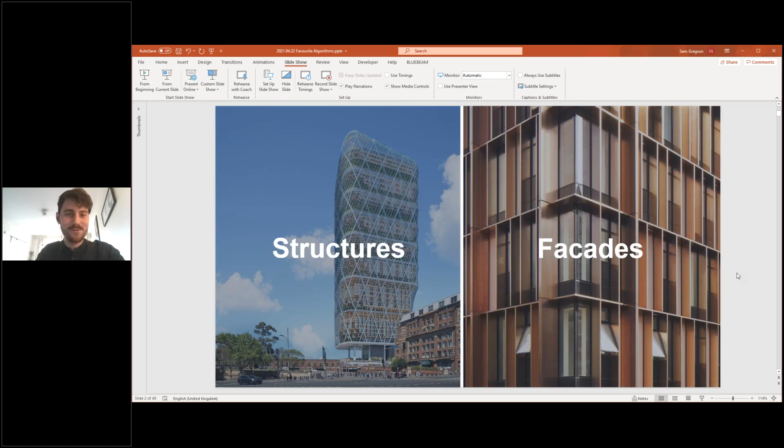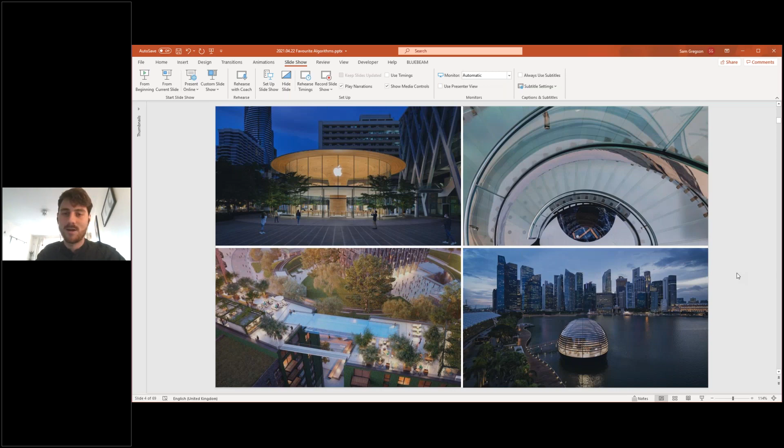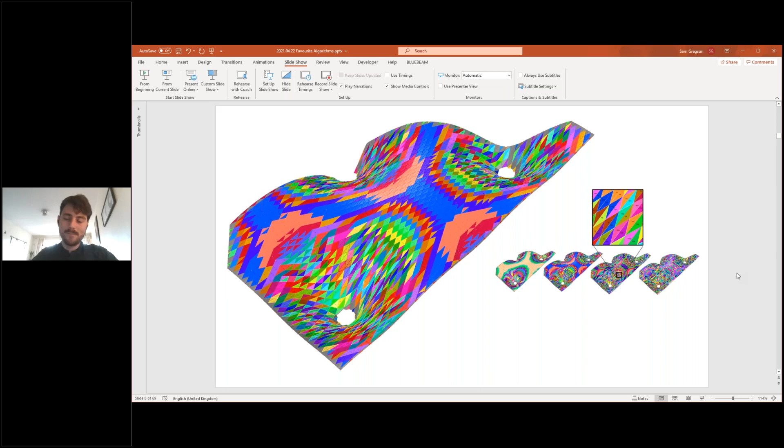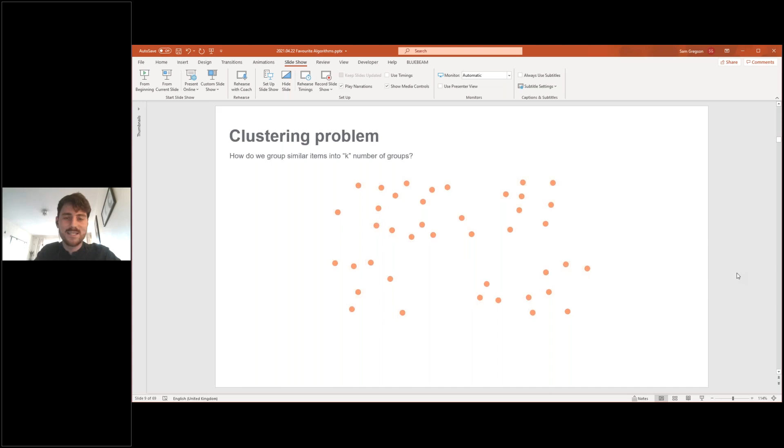I'm going to go through the problem, which sounds very simple but is actually quite hard to do. The problem is: how do you group a number of objects into k groups, where k is the number of groups? This is how the algorithm works.

Say we want 4 groups - this is the basic vanilla version. You pick 4 items, assign the groups based on the closest item to each one, then move that original point into the mean of those groups, and repeat. As we progress through here, the points get reassigned to their closest center mean, then the points move to the center of those objects, and we iterate until we converge.

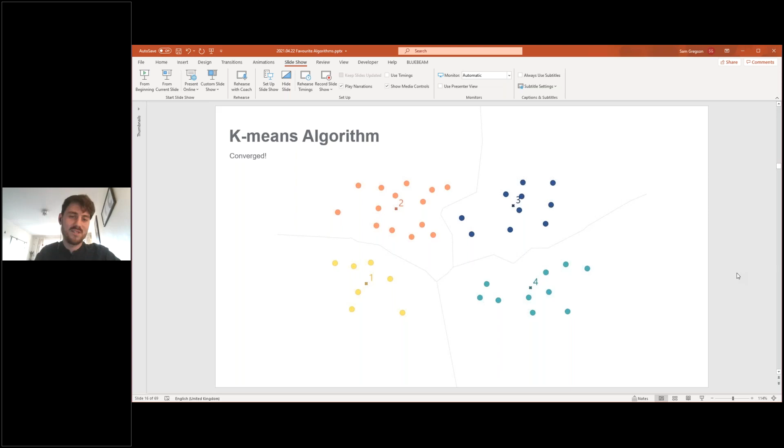So it's a nice simple algorithm, which is kind of why I like it. I'm a simple person, and it seems to work quite well. So there's our kind of output.

So when it comes to panels, the first thing we've got to figure out is how do we measure the distance between two panels. It's quite easy to understand how you'd measure distance between points in space, but with panels, how do we measure their similarity or difference? So two triangular panels will be the same if their edge lengths are the same.

Some other things to consider are whether we're allowed to flip panels, and then there's some other considerations when we go to higher polygons, quadrilaterals, etc.

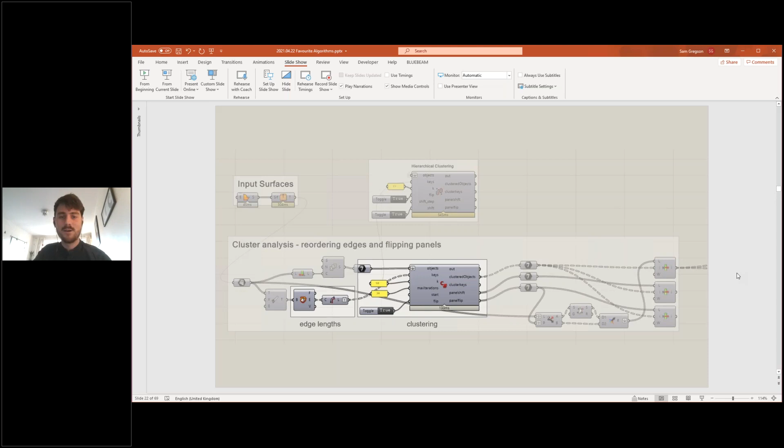So this is kind of what it looks like in our Grasshopper environment. We've got our edge lengths here. We stick it into our clustering algorithm, tell it whether we're allowed to flip or not, and it spits out our clustered objects and our panel shift and panel flip parameters. So it's a little bit more complicated than that, as you could well imagine.

We've got our groupings, but that doesn't mean that they're all identical. So we create an average and then replace our panels in their original position.

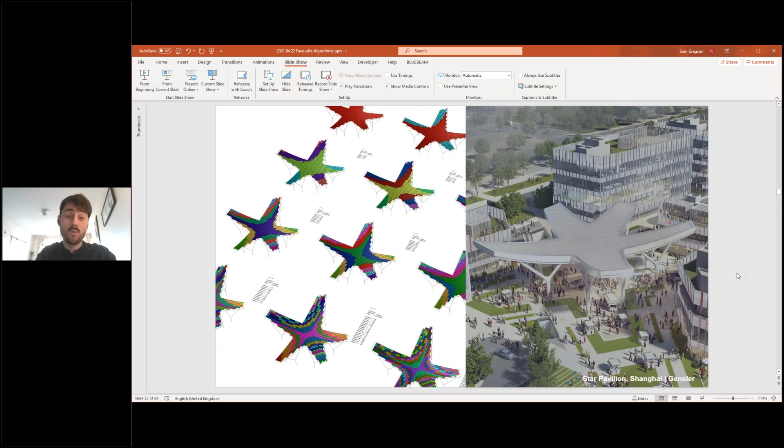So here's a little study we did for a Star Pavilion, and we're looking at how K, the number of groups, affects the deviation of each of these panels - basically the gaps that we'd need between them. In the end, the client decided that he was very keen on having as few panels as possible, and didn't really care about the gap, as it was a rain screen system, and we were fine with that in the end. But it was interesting to do this study, looking at how that changed.

Now, in this study that I did recently for a project, we had a more free form architecture, which meant we were more able to play with the geometry. So here I'm using Kangaroo in the background for clustering, and then smoothing the structure to fit the clusters and repeating.

So there's a bit of Kangaroo play there, and you can see the deviations coming down to about 3 millimeters for 10 different panels.

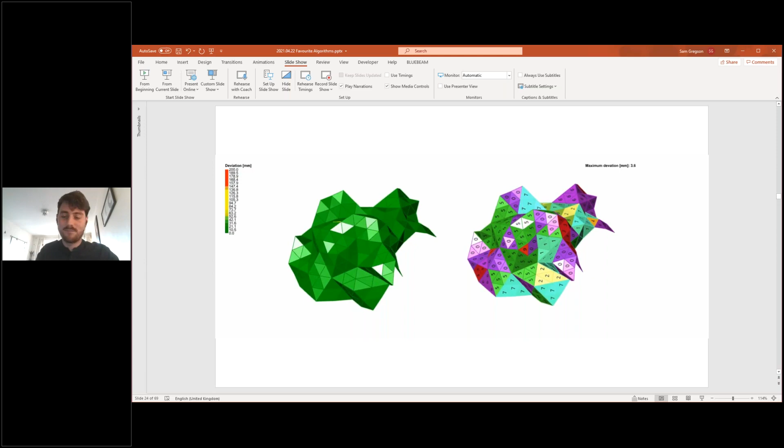So a few things to consider. One, about the algorithm side of things - what is K, how many panels do we want? And as you can see, you can play about and see what the deviation is. Another thing to consider is how you measure distance. I've explained about triangles, but you might be comparing other things, not just panels but any sort of geometry, and there might be some normalization needed.

But other things that are really important that I want to stress are the other side of things to consider, which is what is the tangible benefit you're getting? Because it's nice to think that if we make many panels the same, then everyone will be happy, but you might just be simplifying one part of the process and adding complexity in other parts.

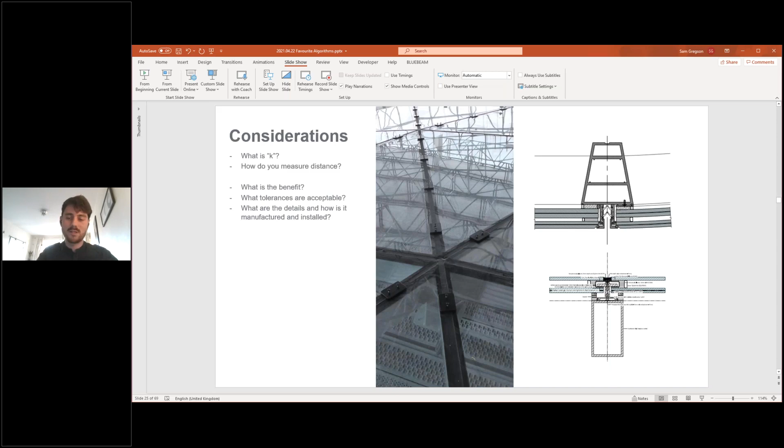So what tolerances are acceptable? In these two questions, you really need to think about the details - how's it manufactured, how's it installed? It really depends on the system. Have we got an open joint rain screen cladding system where the joints are allowed to be large, or have we got some toggle fittings or clamp detail where really we're only talking about a handful of millimeters that's acceptable? So some interesting thought needs to go behind these as well.

This was a cruise ship project. What was interesting here is other ways of tackling this problem. We're using normal geometry like a torus here. So Martin Francis, the designer, chose a torus layout to get a high level of repetition.

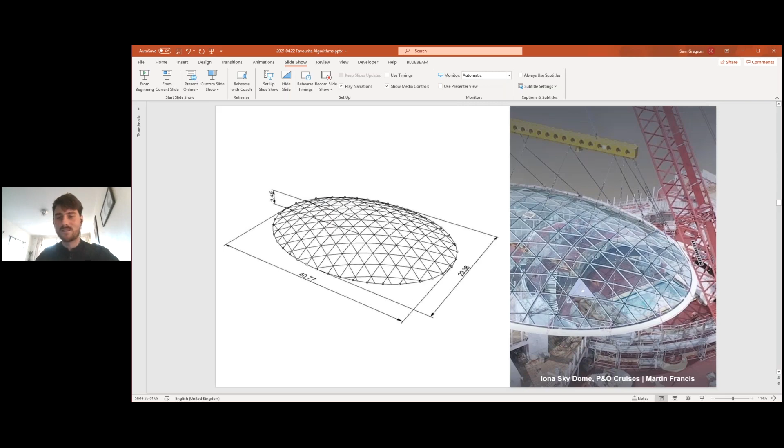So not using clustering panels, but the reason I bring this up is because at the end of the day, the contractor was like, well, I don't mind, I'm cutting these panels with machines and it's all going to be automated, and he smoothed things, changed things around as he wanted. So it was an interesting thing to note that it's not always of benefit to do these things, so that kind of needs to be considered.

And here I just want to show properties. So on the left, I've got a nicely optimized structure. This is a pavilion structure which is glazed with glass.

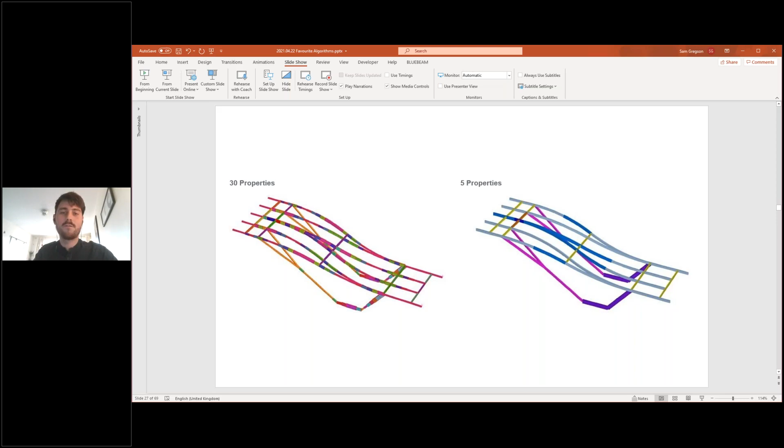I've optimized it. Every beam size is as optimal as it can be for stresses and deflections, but it's not very buildable. So one nice way of using k-means is reducing the number of properties here, and then you've got the rationalized element model on the right, where we've only got 5 properties down from 30.

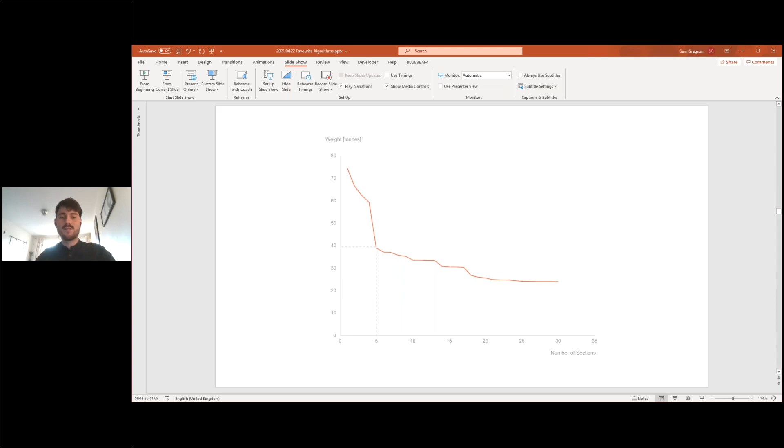And I find this quite a nice visual to demonstrate what happens when you reduce the number of sections, which is on the x-axis, and what happens to the weight of the structure. You can see here it really starts to spike when we reduce it further below 5. So that was chosen as our stopping point, a nice balance between steel savings and making it easy to fabricate.

So my next one is SIMP, or solid isotropic microstructure with penalization. You might not know the name, but this is a topology optimization algorithm. Clemens might talk about BESO - I know that's in his Karamba software, but SIMP is another popular method.

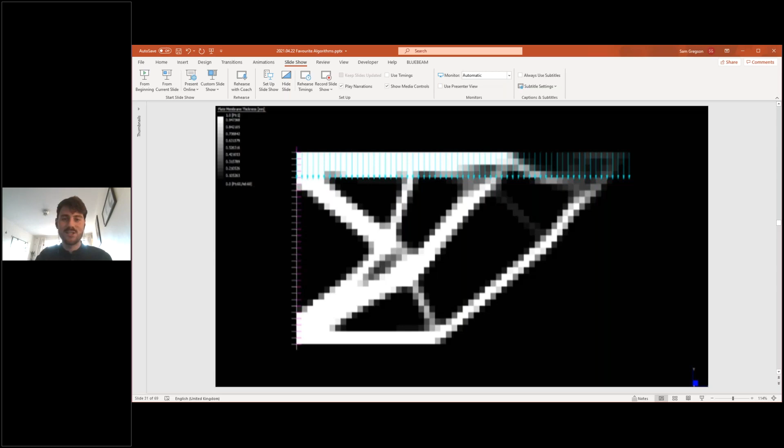It's inspiration. I think people take these things too literally, and what I want to get across is that you can use them to inspire and also to understand.

So here's a dome for a different cruise ship project, and here we can see we're minimizing strain energy, which is a measure of how well it's working, with some constraints there. What's quite nice is that it gives us a bit of understanding of the structure. So at the top here, we've got a two-way spanning structure because it's quite flat.

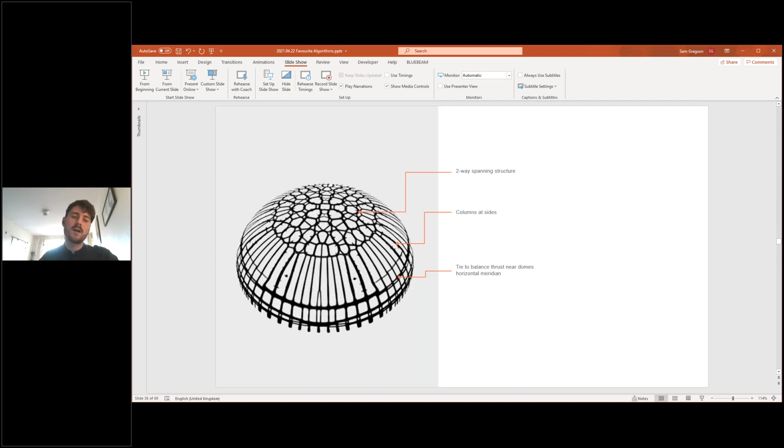Then we've got more or less columns at the side, and then where it bows round, we've got a tie, to contain the thrust that happens from the arching action. So it's actually quite a nice tool to understand how the structure wants to behave, and therefore if we do deviate from this, we understand what the consequences might be.

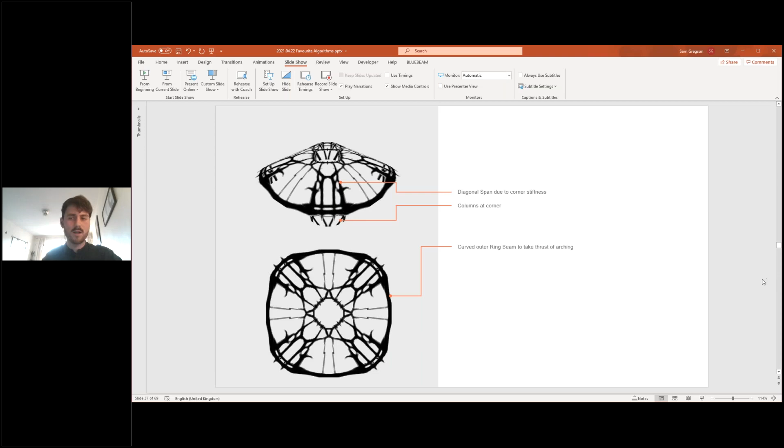So in this instance, the structure really wants to go to the stiff supports of the corners, and so it's added columns there as well. You really get a lot of insight, which helps you think about where you might, even if you don't build something like this, put your biggest columns, your biggest members. And then we've got a ring beam, again very similar to the last one, to contain the thrust from the roof.

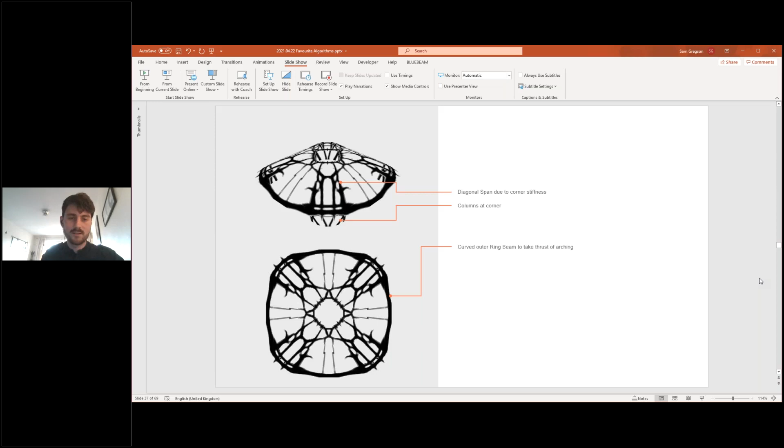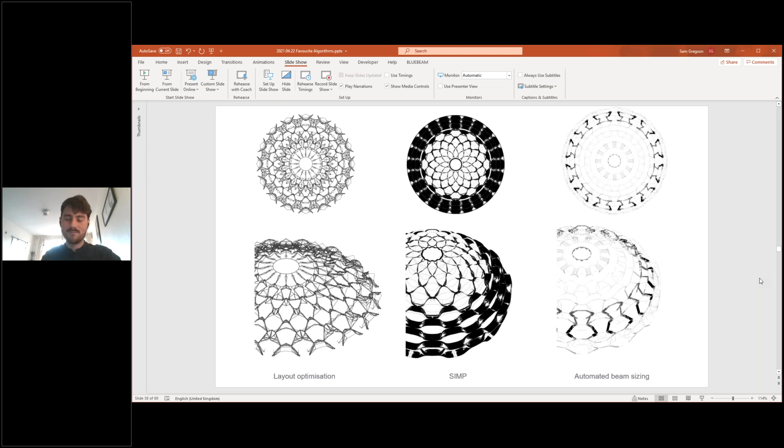There are some different methods - layout optimization. Peregrine is a Grasshopper plugin that does that. SIMP in the middle, and then automated beam sizing gives you similar ideas as well.

And then my final one is Nelder-Mead, also known as the downhill simplex method. This is a gradient-free numerical optimization method. You will all be familiar with Galapagos, which is a genetic algorithm. Nelder-Mead is similar but different. I'll just go through that.

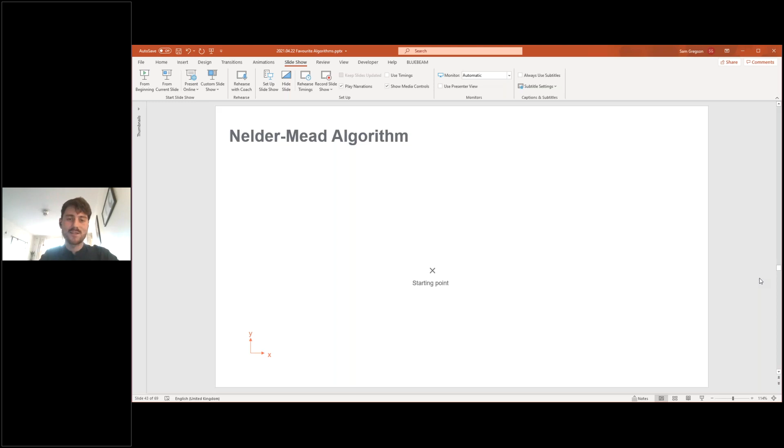So the way Nelder-Mead works is that this is in kind of 2D space. We start with a simplex, which is made of 3 points, because we're 2D, we go with 3 points - we just need one more, and that gives the algorithm an idea of which direction to go, because it's got arms in different directions, so it can feel which way to go. We know the worst point and the best point, and it moves in the direction based on the worst and best points.

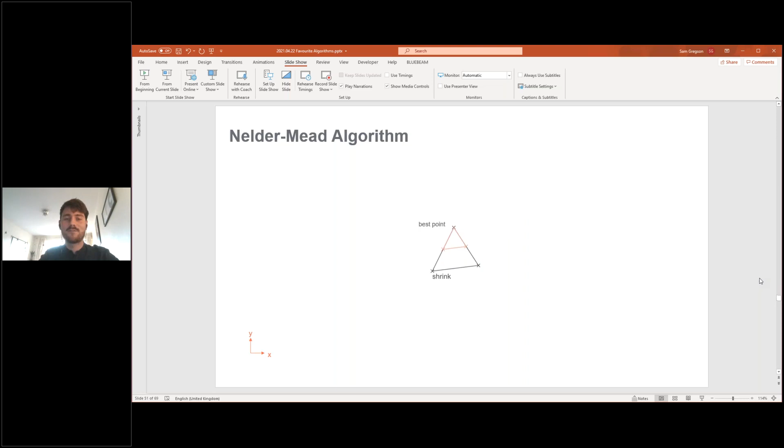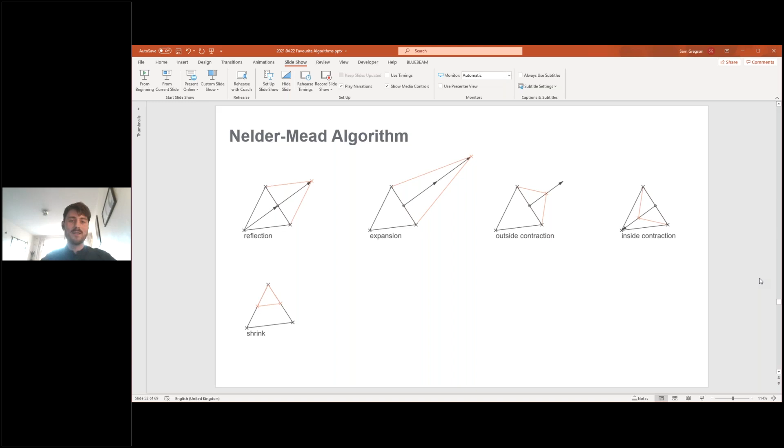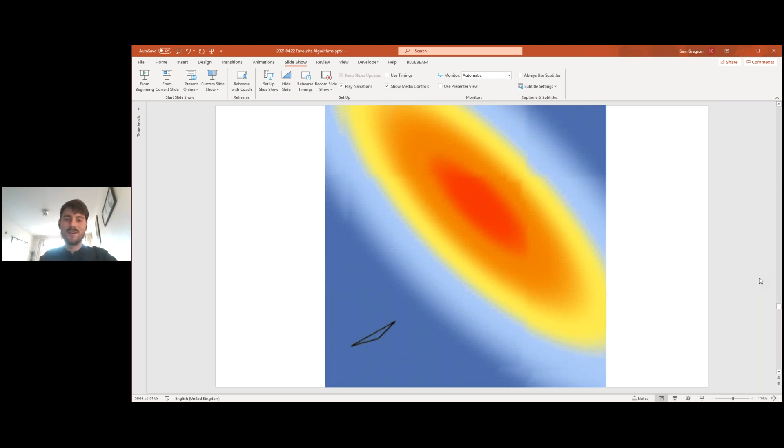Using different methods, either reflection or expansion. If reflection looks like a good direction, it tries expansion to go a little bit further. Maybe it wasn't quite as good. So there's these different methods that it moves about to explore, depending on how good the values it gets from moving around in space. So this is how it moves in 2D, a way to understand how it gets from the blue to the red, where X and Y are the input parameters. Obviously, this isn't the kind of problem that we're looking to solve, but you'll see some examples in a sec.

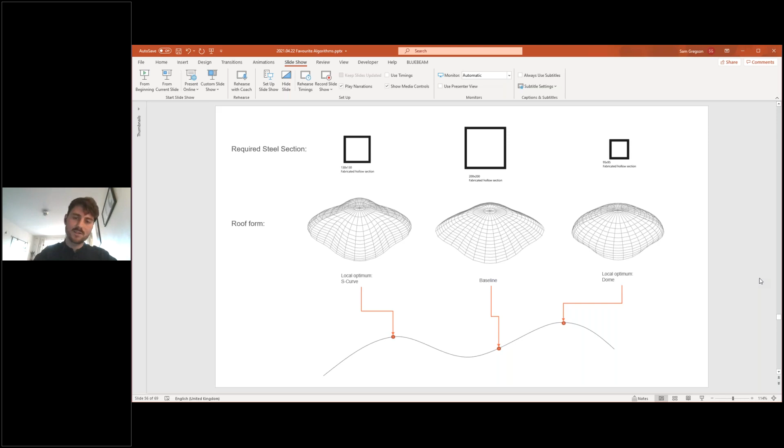We've got 2 local optima. We find those by restarting at new positions. So we've got our baseline in the middle, where you need a very big fabricated hollow section, and then for the local optima either side, we've got different aesthetics with different sizes, much smaller steelwork. So that was one example.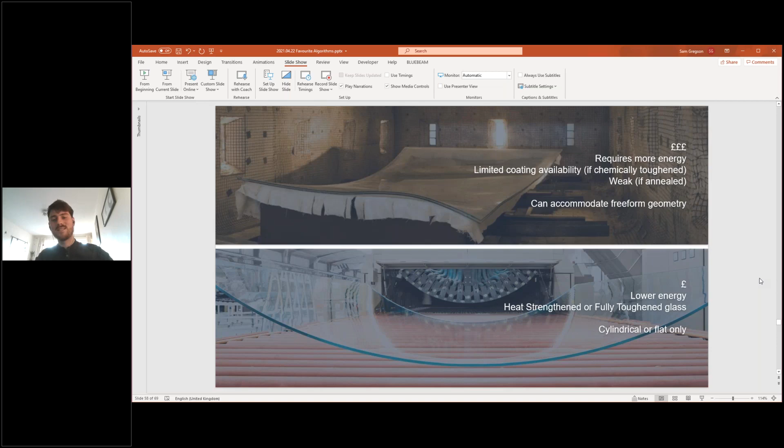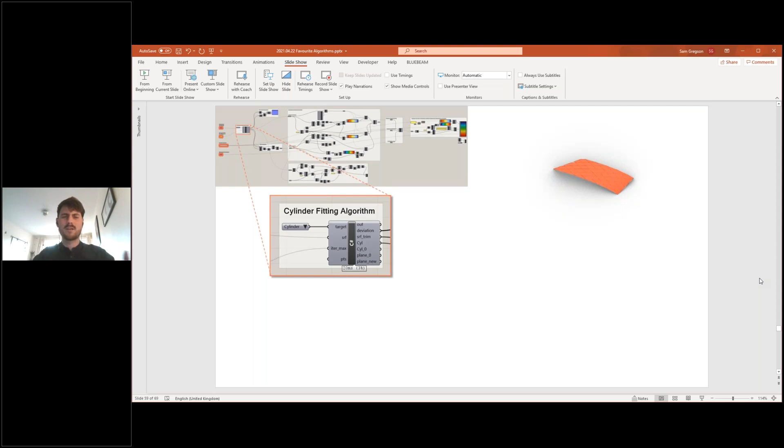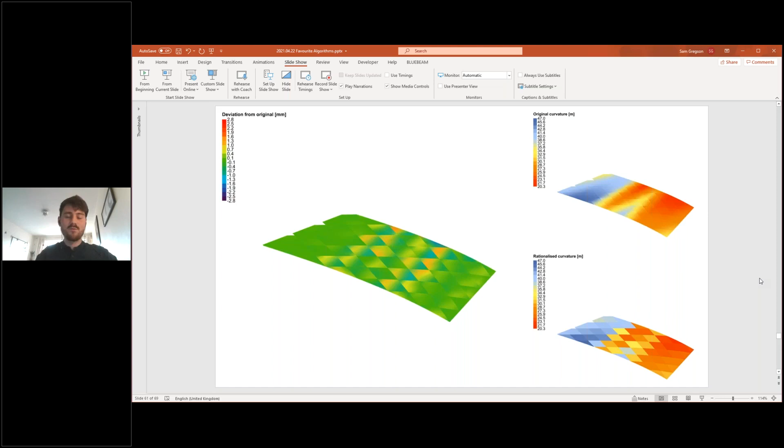So our other use for Nelder-Mead was to take objects, glass panels, and see what cylinder they might fit best to. So we've got a script on the left with our cylinder fitting algorithm. This time our Nelder-Mead is embedded inside our C# component, so there's no Galapagos interface. And we've got our panels on the right, and they spit out the optimal cylinders for them by moving around these cylinders and finding an optimum. So we can look at the deviations, the original curvatures, and the rationalized curvatures, and check whether these deviations are acceptable or not.

We did this on a project at Taikoo Place in Hong Kong. The architects originally were going for conical, which isn't the same as cylindrical, so we optimized, found our best cylindrical representation of those conical panels and replaced them with minimal visual effect, but now making it a lot cheaper and allowing the coatings that were required to be applied to the facade with better energy performance.

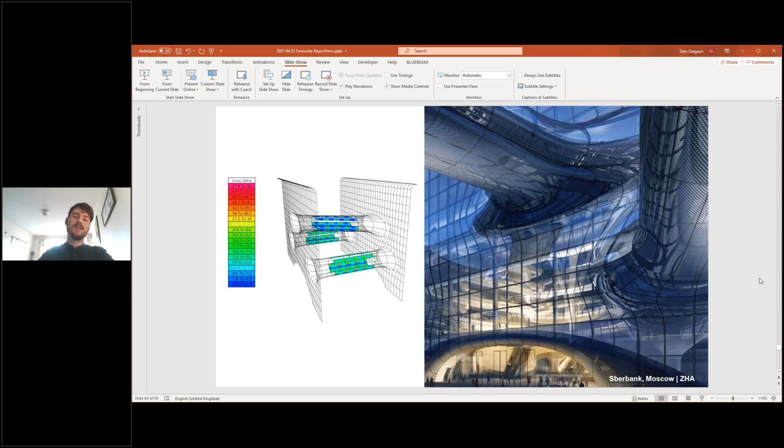Here's Sberbank in Moscow where we extended these capabilities, now looking at organizing the panels into flat, cylindrical, cold bent, slumped, and this required a little bit more analysis of the stresses. So we'll take in our models, going into finite element analysis, looking at the stresses and taking them back again.

And then finally, I just wanted to, because I know I'm short on time, touch on NURBS, which is work in progress, something I'm interested in at the moment, but want to spend some more time looking at. Obviously, Rhino started out as it was all about NURBS. That's how it started, I think, as an AutoCAD plugin to deal with NURBS.

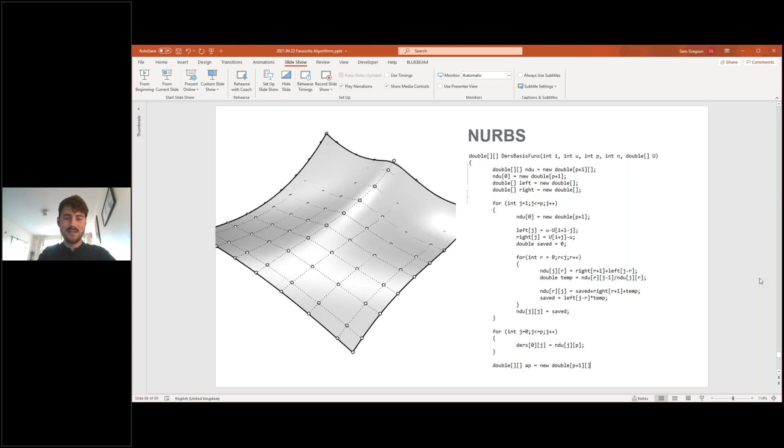But I only realized how cool NURBS were more recently with isogeometric analysis. That's kind of a new thing that's come in the last few years, at least from what I've seen. Kiwi is an example, but I think there's more potential for NURBS.

What I've been looking at specifically is, so NURBS is basically the mathematics of the structure, and you can derive all sorts of things like developability and stuff, and this will give potential to optimize freeform structures in a lot better way than we can do with meshes.

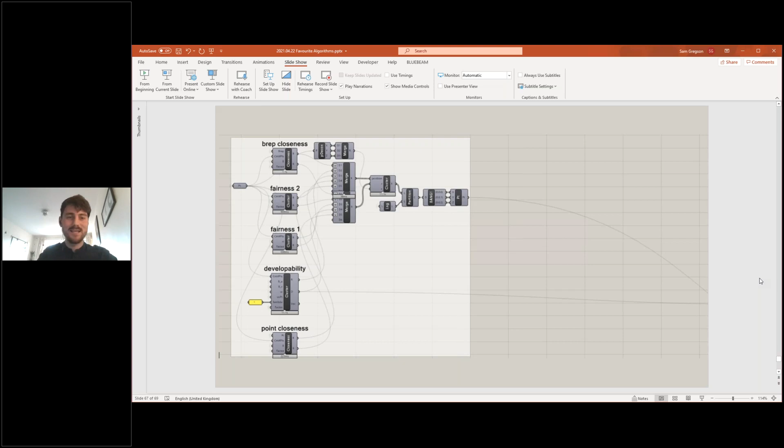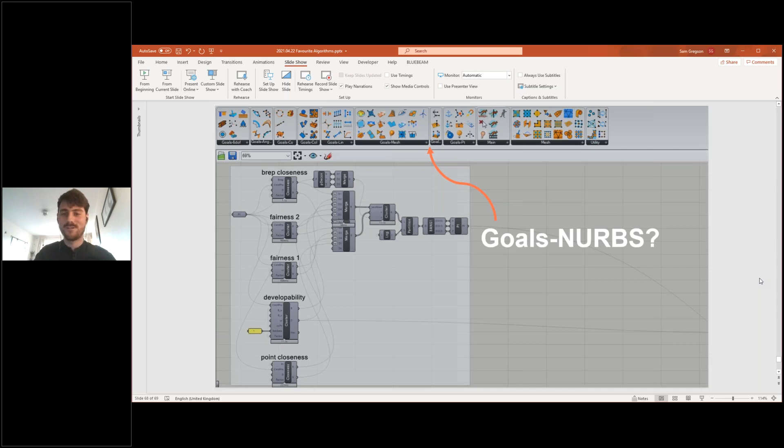So I've dabbled in this a little bit, and really what I'd like to see, hopefully I'll end up doing it, or if someone else could do it, that'd be great. Having a goals NURBS stuck into Kangaroo here, that would be great. I know Daniel Piker has now enabled us to program our own goals, which I think is a great idea. So if we could do this with NURBS and free us from meshes, then that would be great. That's something I'm looking forward to looking into further. So that's me, thank you.

Finite element calculations are usually connected with huge amounts of data which need to be passed around, and this makes the process quite sluggish sometimes if you have to export geometry from Grasshopper to some finite element package. Since Karamba lives inside Grasshopper, this bottleneck doesn't exist. This was one of the things we wanted to achieve, an interactive user interface, so that if you change something on the geometry...

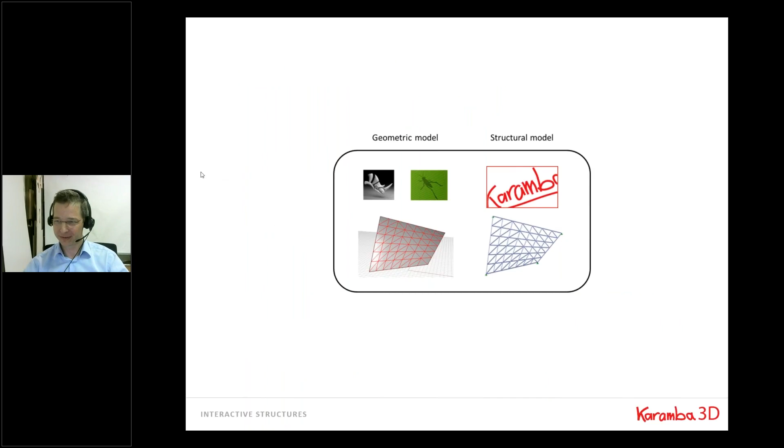Do you actually see my screen? Oh, I think it's stuck now. We can see your opening slide. Sorry, there we go. Oh yeah, but this was the slide which I talked about, that Karamba lives inside Grasshopper, and for some reason it's out of sync.

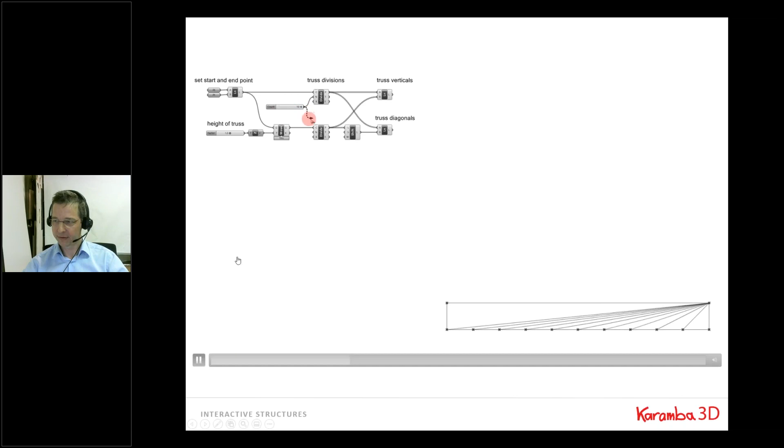Here you see that if you change something in the geometry setup, you can change the geometry, and via Karamba you also see the impact on the changed geometry, or the loading of the structure, on the structure itself. Since Grasshopper is an environment for doing geometry calculations, all the stuff which comes with structures, like loads, supports, cross sections, need to be supplied via Karamba.

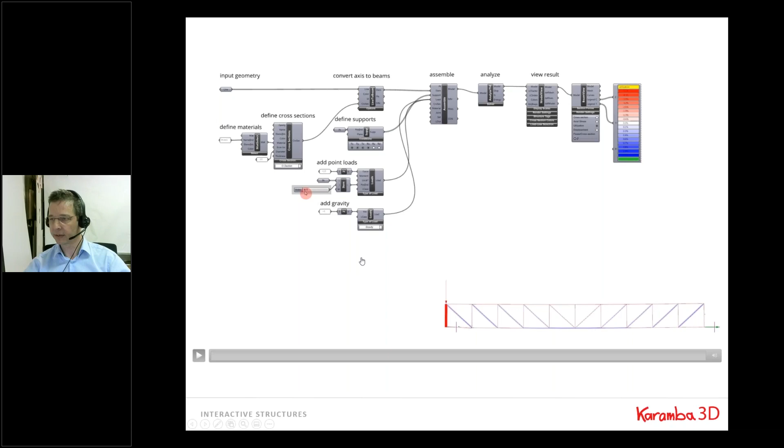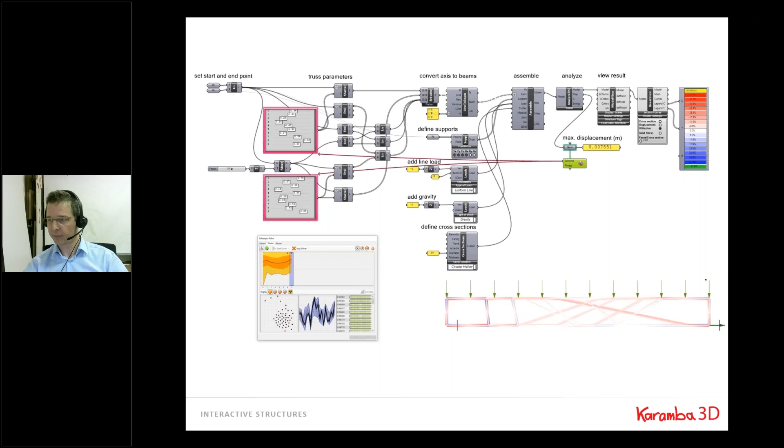And since it's implemented in Grasshopper, you can also make use of the whole ecosystem. Like here, for example, there's an optimization done using Galapagos on a simple truss.

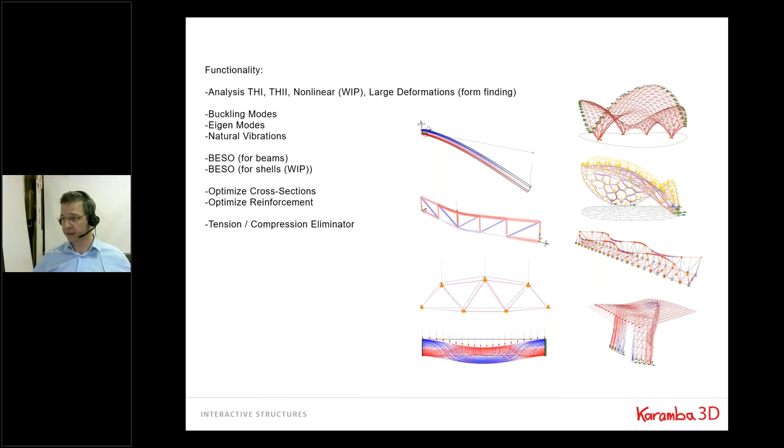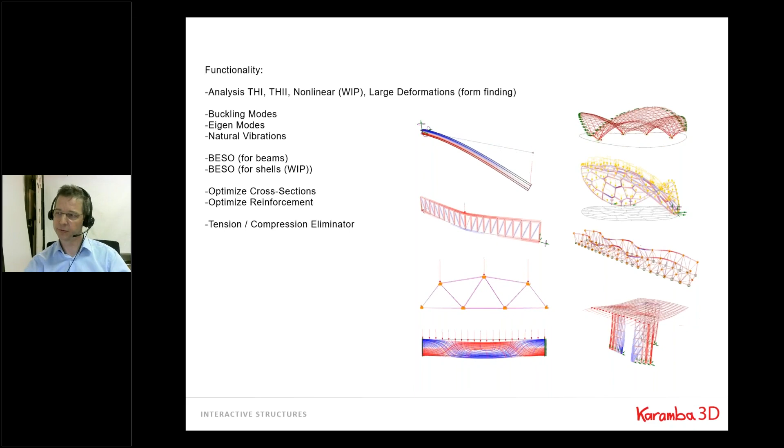With Karamba, you can by now calculate beam structures and also shell structures. There are several algorithms available, like buckling analysis, natural vibrations, cross-section optimization, BESO - bidirectional evolutionary structural optimization - to optimize structures, because this was actually the first focus, to use Karamba for structural optimization in the early design stage. This was where it was used first, in the office of Bollinger Grohmann.

You get from a Karamba calculation graphical results like for many other programs, and you also get out the corresponding numbers, which is quite nice, because this can then be used to inform and improve design, and thereby set up a feedback loop.

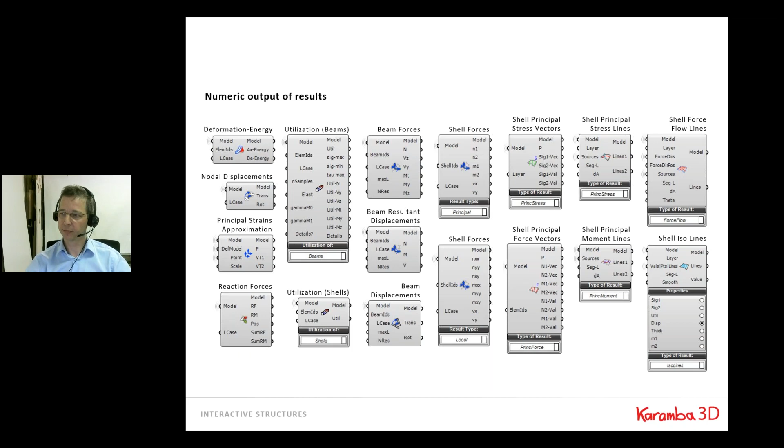In the meantime, there have been plugins around for Karamba which can be used to export the data to other finite element software. This is how it's done also in the office of Bollinger Grohmann, that Karamba is used up to a certain stage, and for producing documentation, reports, and for doing a proof calculation, it's often the case that we move, for example, to RFEM or RStab or some other finite element program to do the final documentation.

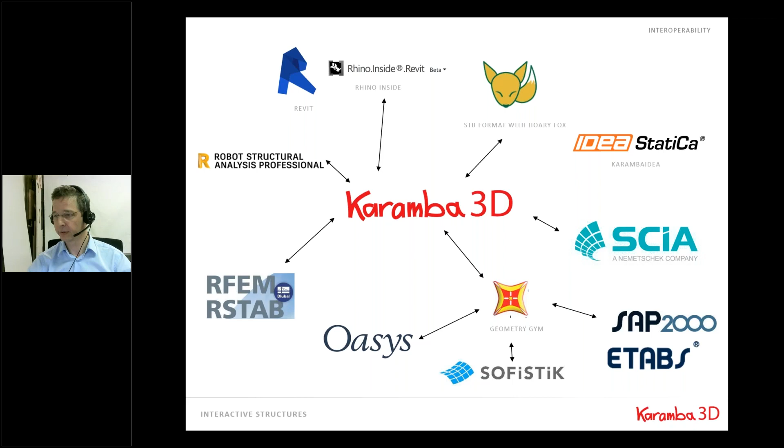One thing which gets more and more use is scripting with Karamba, and that's one of our aims, to open up the software so that you can use Karamba in your own Python scripts or C# scripts. In the meantime, there's now a unit test project available on GitHub which you can download, along with API references.

When it comes to future developments, one thing which is new is that it's now also available on Shapediver. And of course I want to implement more and more things to make it usable in different areas - small things like line joints, which has already been implemented, physical units, and result superposition and spectral analysis. Because at the moment, since Karamba is mainly used for structural optimization, there are some features missing which you would have in a normal finite element code.

Because when it comes to optimization, it's often not necessary to calculate a very detailed mechanical response of the structure, but it's rather important to have a relative measurement between different alternatives of a geometry or structure to make optimization work.

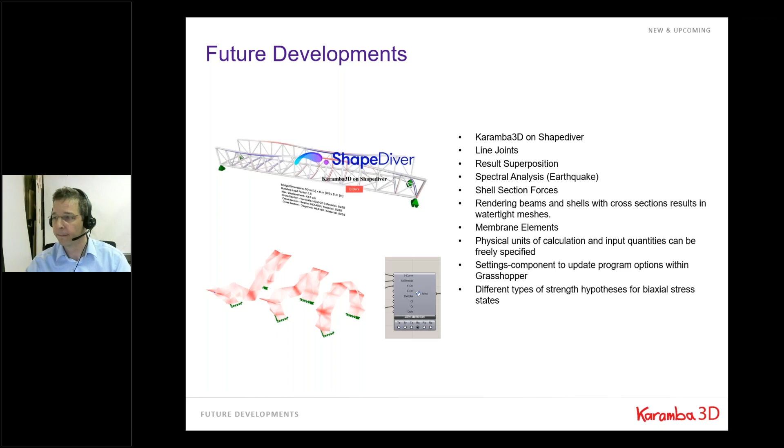And of course there's also a GitHub page where you can constantly download the latest builds, and it's an open development insofar as feature requests can be posted or bug reports.

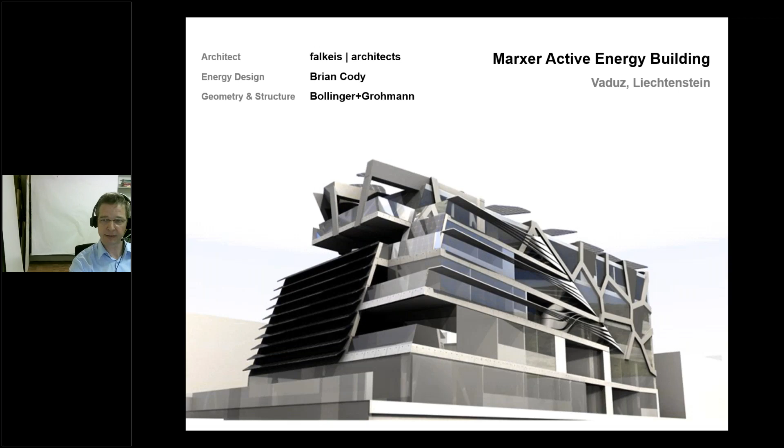And now I would like to turn to three projects. The first one is a dwelling house called Marxer Active Energy Building. It was done by falkeis architects here in Vienna, and the building site is Vaduz, Liechtenstein - a small country near Austria.

And the special thing about this project is that it has all the latest energy saving technology and solar panels and everything, so that it actually creates energy instead of consuming it. Bollinger Grohmann was asked to do the optimization of the structure.

And this is how the structure basically looks like. There are several floor slabs. There is a large wall at the back and an elevator shaft, which are there for the horizontal stiffening. Since this is not quite sufficient, there are also these V-shaped columns, which also provide some horizontal stiffness, and of course can also provide for vertical load takedown.

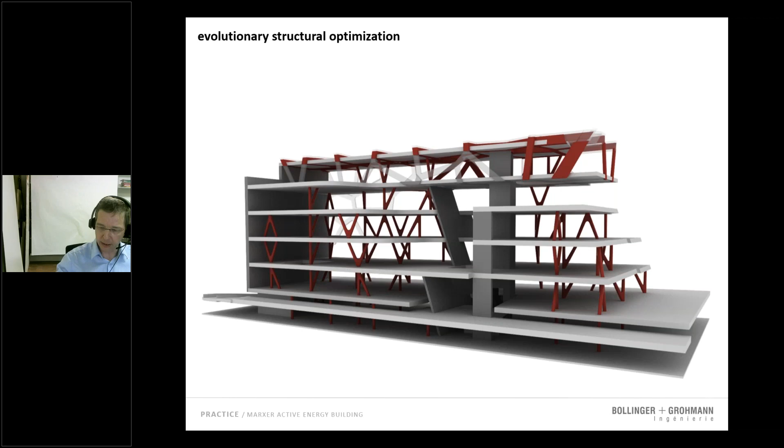And the question was where to place these columns, how many we need and where to place them. For this, my colleague Robert Vierlinger used Karamba, and here the BESO procedure was used.

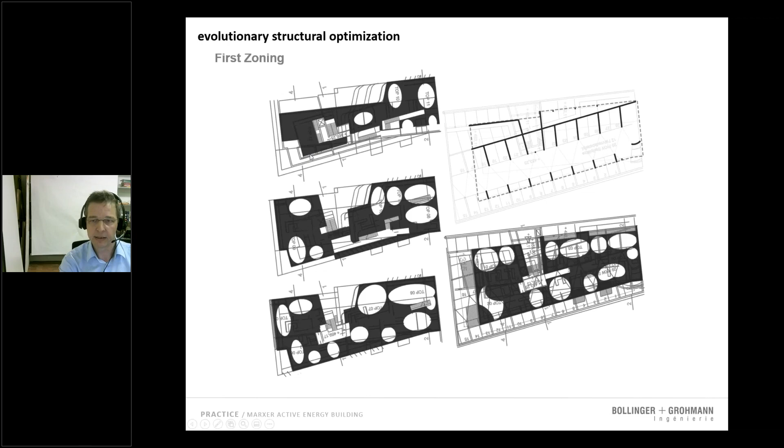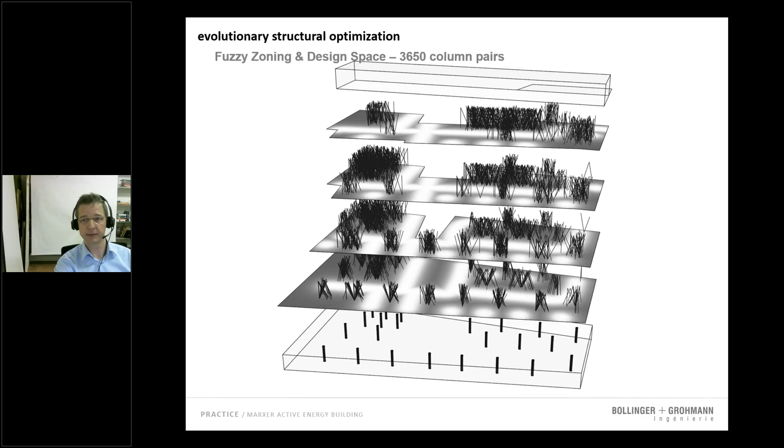There were regions in the floors where columns could be placed - you can see them here, the dark gray areas. So he set up a structural model, filled it with columns, placed the driving loads on it, dead weight and wind in this case. Then the BESO procedure gradually removes elements which are not much utilized. So in case of columns, a certain percentage with the smallest normal force get removed in each step, and the number of columns is reduced step by step.

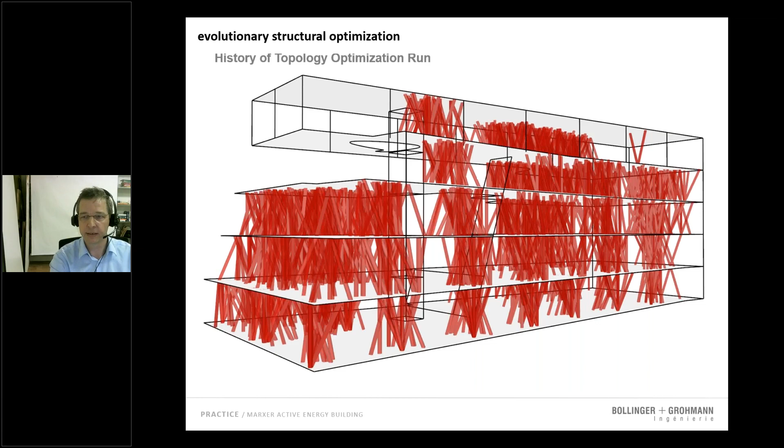What remains is a pattern which shows how the forces flow through the structure. In this case, you can see there are column trees which remain. This is the first approach to optimizing the columns, and Robert Vierlinger also used a second approach.

Then there's a second step, namely Galapagos, and he used it here to orientate the columns. You can see that there's a relatively large gain at the beginning of the optimization, which gets less and less.

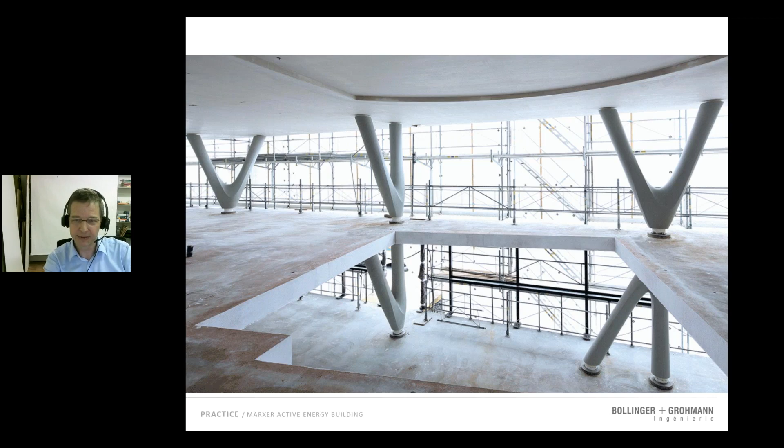This is how the structure looks like. The columns are prefabricated, so they have a very smooth and nice surface. However, the concrete in this case is rather a covering for fire protection, so actually it's more steel than concrete inside those columns. This is how it looks like in real life, and it comes quite close to the vision of the architect.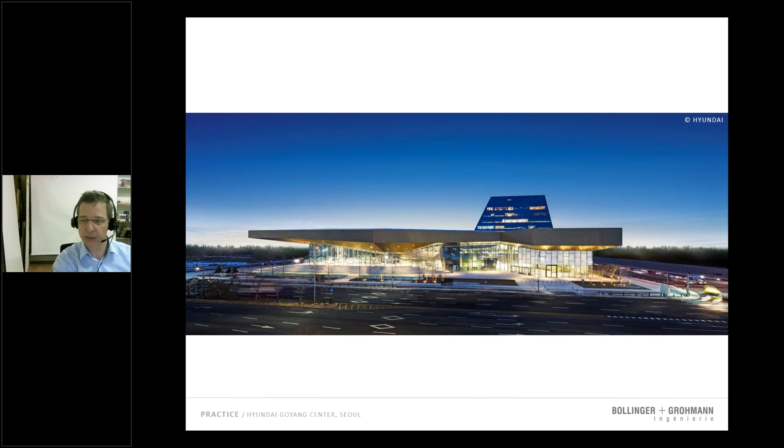Here's a second project, done by Delugan Meissl architects - the so-called Hyundai Goyang Center, basically a flagship store of Hyundai Motors, a big shop for selling cars. The idea was to have a large open space underneath a roof which floats above this space. The roof is not only a roof, but also houses program - there are offices, a little garden, cinemas, quite some program.

The first step here was to design a steel structure which conforms to the program. You can see there are 4 reinforced concrete cores, which are there for the horizontal stiffness of the structure, and the span between those cores is approximately 50 meters, so quite large spans.

The question was how many additional columns are necessary. Of course the architects wanted an open space, so no columns, but it's also a question of cost.

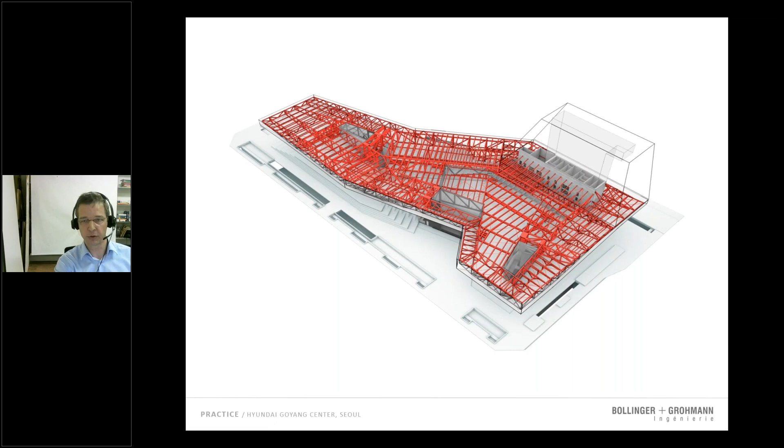My colleague Robert Vierlinger again set up this geometry as a Karamba structural model, included the governing loads, did a cross-section optimization, and clustered the cross sections, because it's not practical to have hundreds of different cross sections in such a project.

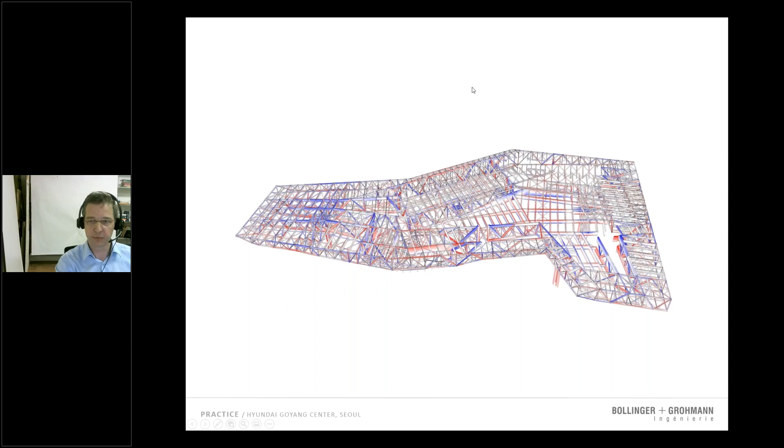What he also did, he used Octopus to do a multi-objective optimization. The columns are actually not columns, but column clusters, like small woods of bamboo. The position and number of these column clusters was parametrized and optimized using Octopus.

There were different goals, like the maximum displacement and the total mass of the structure, and the mass is a very good indicator of the cost. The diagram you can see was done in a very laborious calculation - lots of optimization calculations were done, and it took a very long time to actually compute this diagram.

What you can see is that if the displacements need to be small, then one needs to invest a lot of mass. For example, for 5 clusters there's the maximum, and the more displacement that is allowed, the smaller the mass that needs to be invested. So for 5 clusters you have a rather extreme mass, for 6 it's getting better, and for 7 it's quite relaxed. This diagram was the guide for the architects.

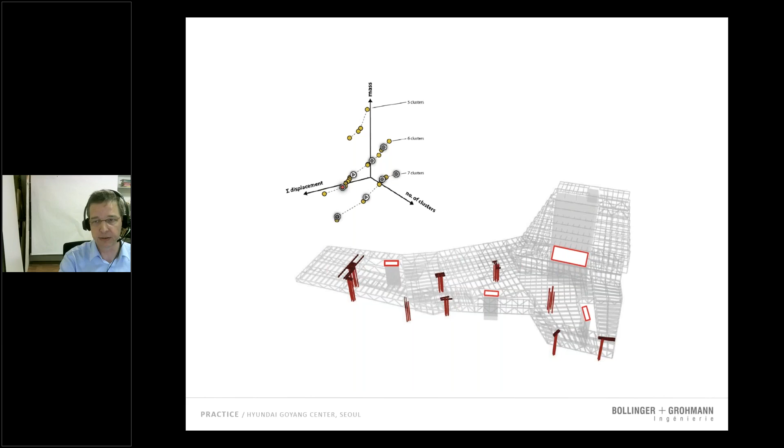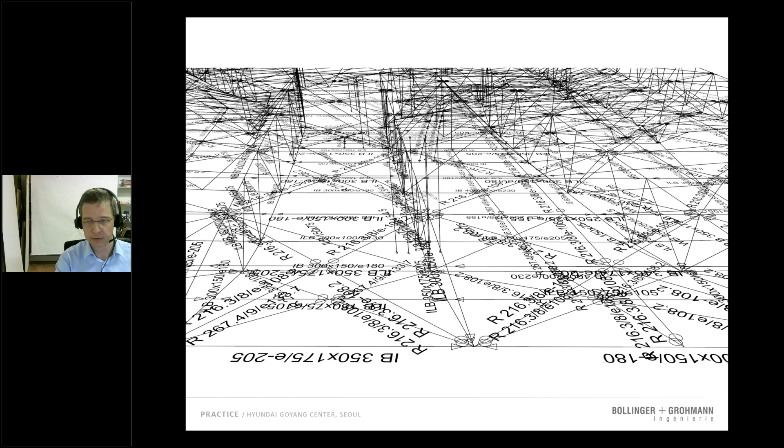They then chose one alternative from this diagram, which was built - this one here. Another nice thing about having this model in Grasshopper was that the drawing of sketches could be automatized. My colleagues Moritz Heimrath and Adam Olinsky set up quite a large Grasshopper definition at that time, so changes the architects wanted were easy to accommodate, and sketches could be updated automatically. Today we would rather use Revit for this task, but at that time it was done using Grasshopper.

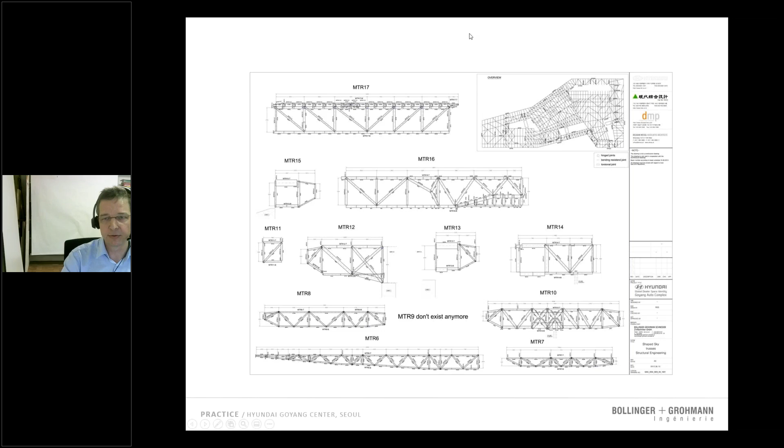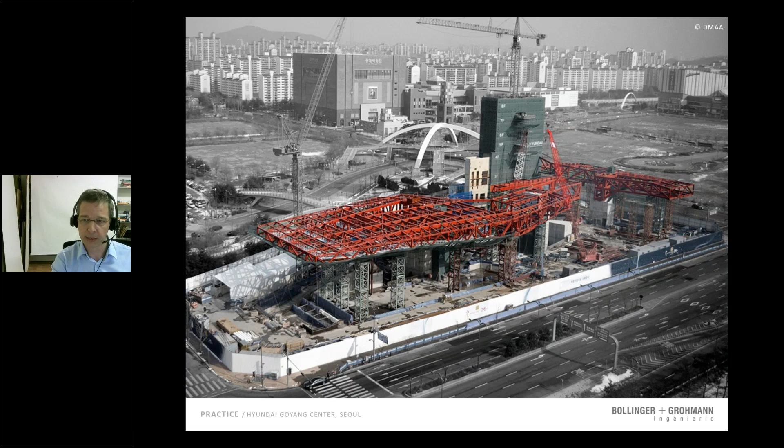You can see here how the building site looked like, and it's now been opened about 2 years ago. It was a very nice project where Karamba was used up to the detailed design.

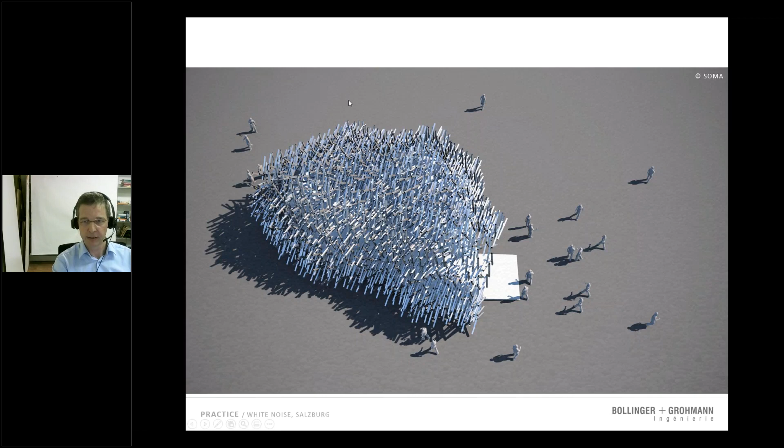It looks very random, but actually it is not, because the system consists of many layers of these rods, and their position is defined via the membrane on the inside. What gives the randomness is the inclination of these rods — this is one layer, this is the next, and the next.

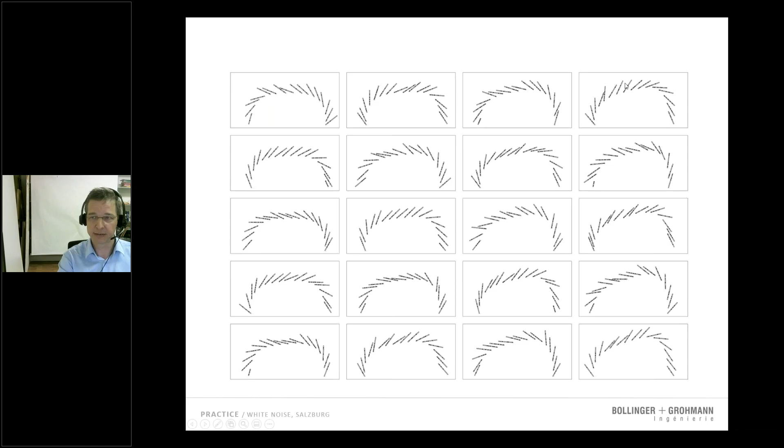The structural system works like this, where there are intersections between two layers. We have connection studs here, shown as black circles, and the inclination actually governs the way the forces flow through the structure.

So what the architects wanted was a structure which looks random, but at the same time stands up, of course, and has good structural performance.

So my colleague Moritz Heimrath set up a Grasshopper definition. He used the geometry of the internal hull — there was a membrane for sun protection and rain protection — and he parametrized the model with this surface.

He split the whole pavilion into 5 parts to make it work with Galapagos, because reducing the number of free parameters is quite essential — the more parameters you have, the longer it takes to get a reasonably good result.

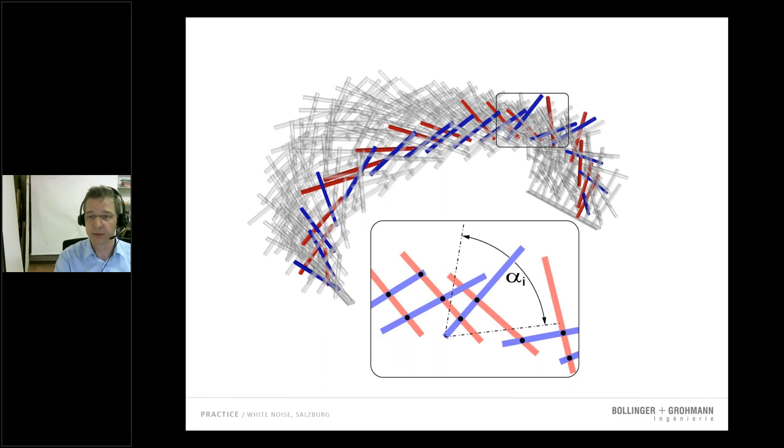The governing load cases in this case were the pre-stress of the membrane underneath the structure, at the same time wind, and of course dead weight.

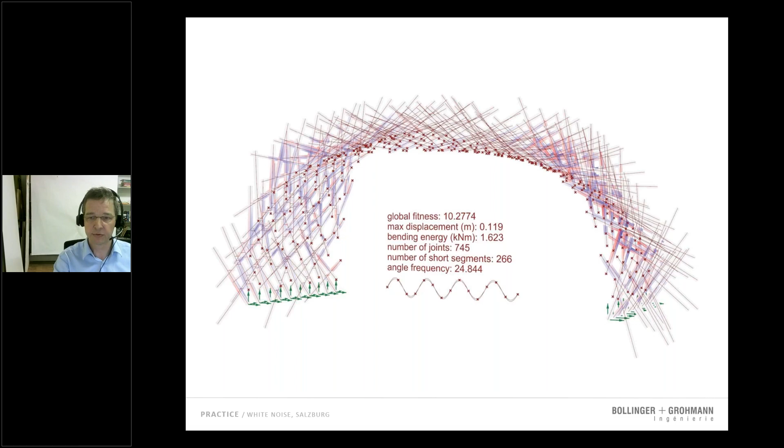Using Galapagos, which only allows one objective, he had to put together a fitness number which took account of maximum displacement and bending energy, both indicators of stiffness, then the number of joints, an indicator of cost, and number of segments. From all of this he set up a global fitness number, used to do an optimization which took approximately one night.

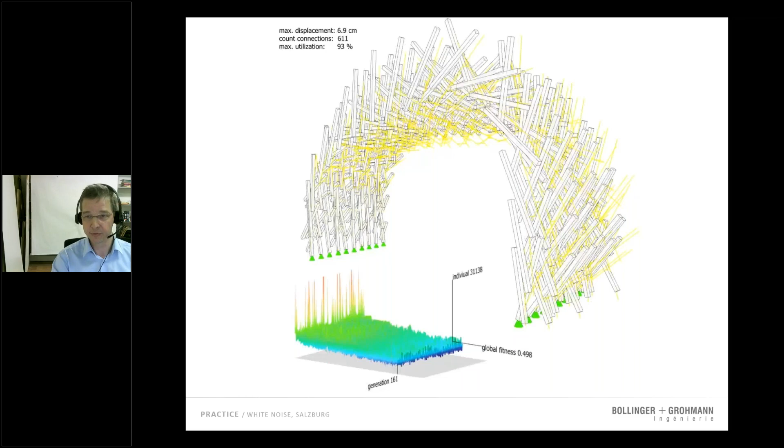At the beginning, since the starting point is a completely random orientation of the rods, the performance of the structure is very poor, but it gets better and better over time. We certainly haven't found the global optimum, but it was a solution which was reasonably good, and this was fine for us and also for the architects.

Since all of the parts were different, it was quite essential to have a digital workflow. At that time we used Excel sheets to transfer the data to the workshop, and it's very important to have a certain kind of order so the right parts are there at the right time. You can see here how the structure was set up, put together layer by layer.

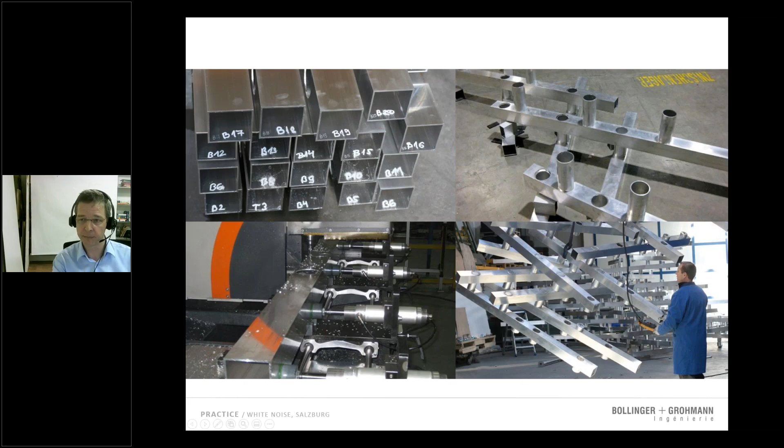And this is how it looked on the day of the opening. I didn't mention this, but it's the main venue of the Salzburg Biennale, a festival that takes place every 2 years. So every 2 years, this pavilion is set up for about 3 weeks.

At the beginning, the Salzburg people didn't actually like it, because they're quite conservative. But maybe over time they will get used to it.

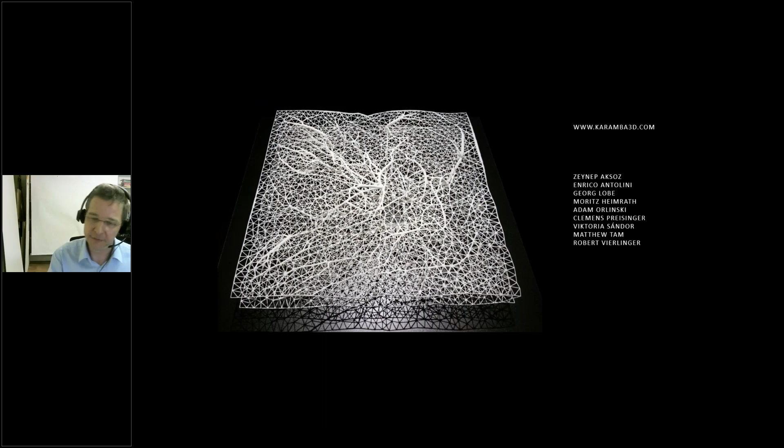Karamba is a team effort, and you can see the team members here. Thank you for your attention, and I'd be glad to answer your questions.